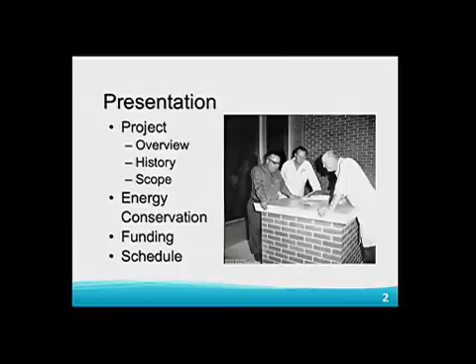Thanks, Ted. Freeman Anthony, Public Works. We're going to take a closer look at this project and the scheduling. I also was fortunate to dig into some of Whatcom's archives for this presentation, so there's some good old stuff here. Today we'll cover the project background—Ted covered some of that—then look at energy conservation aspects, the funding, and the schedule.

History of the project, going back to the plant. As Ted said, it's unique that it doesn't have pre-treatment. It is fairly common to have that now in Washington. Pre-treatment can help a lot with turbidity events, where large rain events suddenly add a lot of suspended solids. Typically we've been taking those out through our gravity filters, but there are better processes to do that on the front end. This pre-treatment project was specifically identified in the Water Comp Plan update in 2013.

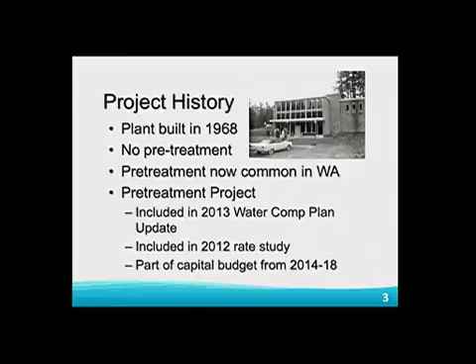We did consider the funding in the 2012 rate study, and it's been in our capital budget for a few years now. There was also some pilot testing done—we've been at this since probably 2010 or so, thinking and contemplating what this project would look like. In 2010, we did an analysis of the different technologies out there via our triple bottom line plus approach.

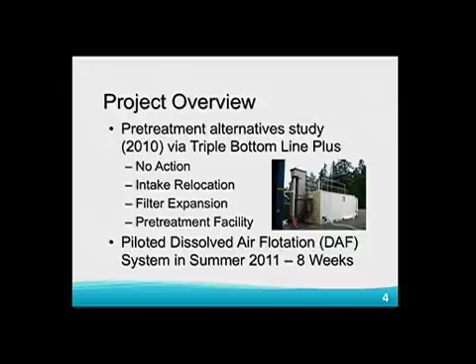We looked at some basics—what could we do for pretreatment? We could do nothing, we could do an intake relocation for the source water, we could add more bays instead of adding pretreatment, or look at a facility. We piloted a dissolved air flotation system for about 8 weeks in the summer of 2011 because technically that seemed like the best fit, and we were pretty comfortable with the results. Staff also visited a couple sites up and down the coast to look at existing facilities.

So what does the pretreatment look like? Well, it's called dissolved air flotation. Basically it's a couple pretreatment basins that allow us to remove the suspended sediment, and we can expand these in the future to three if we need. Having two trains allows you to run one and take the other down for redundancy, which is a huge help from a maintenance standpoint.

That's really the bulk of the project, both in cost and technical challenge, is going to be the pretreatment system. When we are up there doing these upgrades, there's a couple other things that we need to add to the scope of the project.

One is going to be an upgrade to the chlorine injection system. There's two reasons we have to do that. One is, as we construct the pretreatment facility, building permits are needed, and therefore you have to upgrade your building to code. Our current buildings do not meet code for storage of the chlorine cylinders. Also, the chlorine delivery system equipment is at least 20 years old, and it's time to replace that equipment. It's hard to get parts for those. So that's an added piece of scope to the project that is pretty much exclusive of the pretreatment tanks.

And then in addition to that, we're going to put an injection system in for taste and odors. The scope of the project is going to include just the pipe work required for this future taste and odor system. Right now we've kept it out of the budget just for cost control. If there's an opportunity as we go through to put the actual dosing system in, we'll do that. But right now we're going to put the injection system in, but hold off on the actual storage and delivery of the taste and odor treatment.

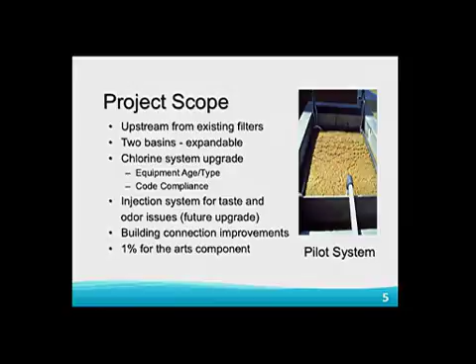So that's something we've worked on with planning. We're trying to incorporate the art into the project rather than a big statue of something. We're looking at rerouting a little bit of the adjacent trail along Whatcom Creek to be a little more natural and to put some signage and art in that pedestrian experience, while also improving connectivity for the trail users through there.

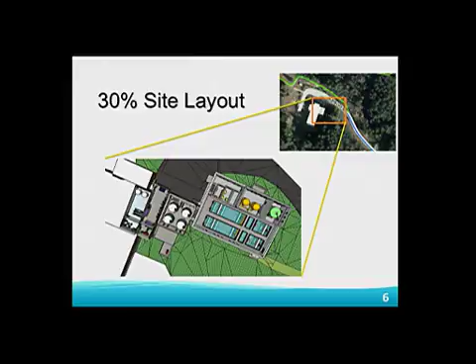Energy conservation. In tune with our climate action plan, we asked, okay, what is this going to add to the plant as far as the electrical draw each year? We got our consultants to quantify that and looked at what the options were around town for water-related efficiency or energy production to offset that energy use.

We did look at inline hydro turbines, and we had a look at this probably 8 or 10 years ago. We would love to do it. We do have a large water supply that is above the city, but the bottom line is it's not really very far above the city. We have service areas above that high water line, but what you really need is an impoundment that's 300 or 400 feet above everything, like in Boulder, where you'd have some excess head to lose. The bottom line is we don't have any excess head in the system, so there's nothing that really works well for inline hydro.

The other thing is we are creatures of habit, and we use a lot at different points during the day, but the flows through the pipes to the city of Bellingham aren't consistent. You might make a bunch of power while everybody's having a shower in the morning on one line, but then it's not going to do anything at 4 in the morning, so you're not generating power. Those are the basic issues with trying to do that in the existing system. In the future, if you have a water user that uses water 24 hours a day and lots of it, that's where you might find that application useful.

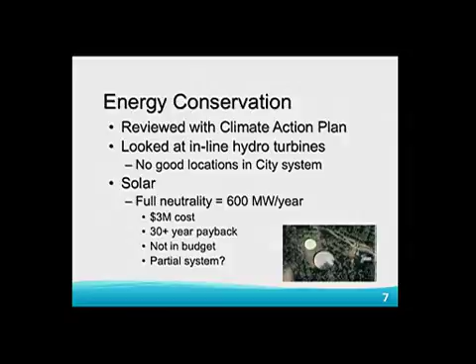The idea is, what can we do to offset that power use that we're adding to the system? So we'll be taking that back to council when we get a better scope of what that looks like. I don't know, Eric, if you have any additional comments on that? Okay.

So the project funding, there it is from the 15-16 budget. We have a combination of funding sources. We're still using our 2008 water sewer bond, which has basically paid for all the design requirements. We have a state revolving loan fund that will cover the bulk of the funding, and then we look at 2016 water funds or other future funded things to take up any excess that's necessary.

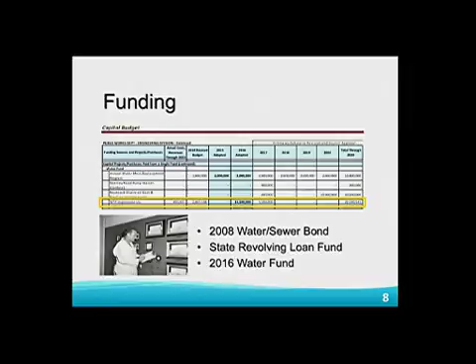Schedule: so today, immediately following this presentation, we will ask for a bid award. The bid award is for the DAF equipment itself, and DAF is dissolved air flotation. That's really the guts of the whole project. We've done a pre-selection for the equipment, so we know who is going to be delivering it. It was still a competitive bid. There were two bidders, both out of Pennsylvania. It's a very specialty type of construction.

But now that we have this bidder selected and presumably awarded, we can work directly with them as we design the concrete structures and all the piping penetrations, so that at the end of the day we know what we're going to get, and it's not a big design change when you get a different equipment vendor. So that'll be forthcoming today.

In October, we'd like to do the same with the chlorine generation equipment, also known as the HYPO system. We want to know who we're going to get, bring you a bid award for the lowest bidder, and then work with them through the design.

In January, we're looking for a 90% design, and we'll come back to council and say this is what it looks like. We'll have an idea of the art components at that point, and really our final budget numbers. We can understand if we can bring the taste and odor system in its entirety back into the project, or if that's just going to be the injection system for now, with a follow-up project in the future.

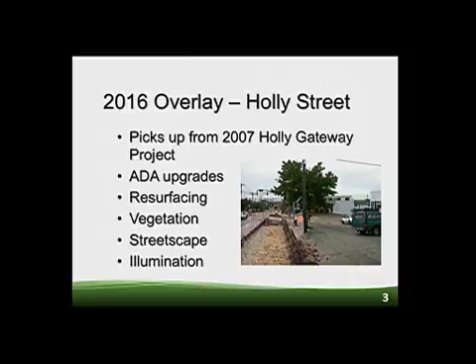How are we doing with vegetation? Are there streetscape improvements that could make it a more vibrant corridor? We'll also take a look at illumination, although, as you know, we have an LED retrofit going on all over town, so I expect illumination to largely fall out of the scope for this project.

So we'll take a closer look at the brick and bollard ADA upgrades. This is from our concept plans that we shared at the open house. I hate to say it, but it's kind of boring—we're basically keeping the same thing that we have.

What we are doing is using a white granite paver to serve the purpose of the truncated domes—those are the yellow pads you see on sidewalk ramps. Instead of doing yellow, planning said no, you have to do something nice. So we're using white granite pavers that meet the ADA requirements with the truncated domes.

Visually, the contrast will still be there, but it'll be less garish than the yellow. We'll also be relocating and upgrading the bollards.

I know there's been some discussion of the bollards. Our intent is to largely keep the same design aesthetic of the existing bollards, but we'd like them cast as one piece with a lifting eye for operations—it makes it safer to move them around. Currently they're actually two pieces of concrete glued together, so they can be kind of a chore; they can fall apart. So we're making a few upgrades for the maintenance folks.

We'll keep largely the same pedestrian footprint that we have now, with minor modifications to ensure we keep the minimum 10-foot returns and that sort of thing. We'll be upgrading a couple of the ADA parking stalls so they have their own little ramp right up from the stall—we have ADA parking stalls, but they need to be updated a little. That's really the bulk of the project.

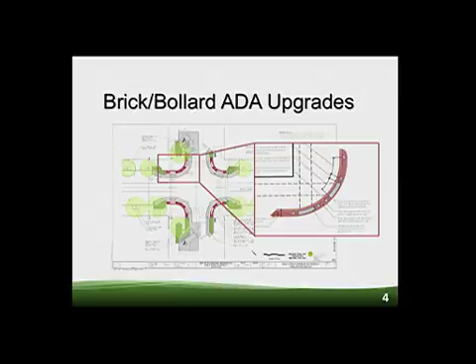At each one of these corners there'll be a fair amount of work, and that'll be a bit disruptive—okay, a lot disruptive. But we'll try to preserve as much of the existing sidewalk area as we can, because that both facilitates movement during construction and it's less costly if we can keep the existing sidewalk.

One thing you'll see on Alabama right now is we're widening up all the tree wells to remove impervious surface and increase the open area around the root structure—our understanding is that makes for healthier trees. We're not going to put in any tree grates here. What we're hearing from our consultant is trees thrive best with some sort of mulch or crushed stone backfill, not a grate. From a maintenance standpoint that's actually quite helpful too, because it's much easier to freshen that up and make sure it's flush, versus cutting out chunks of grates.

The Arts District will still have its own grate system, but this is the main downtown. You'll see ADA upgrades at the alley crossings and similar spots. We'll also do some curb and gutter replacement here and there, making sure we wind up with a 6-inch reveal on the curbs, which is basically pedestrian protection.

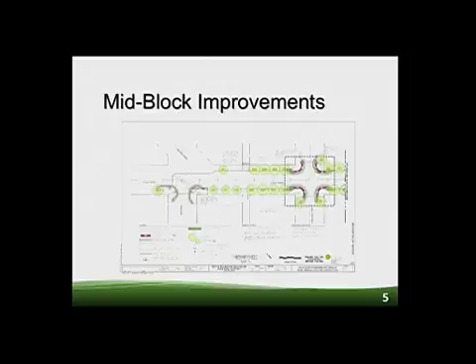That really covers your street improvements there. We will be bulbing out the 2 corners of Bay Street, heading down to the bridge, right opposite from Bayou. That's a lot of pedestrian traffic there.

So as Ted said, looking at the corridor and then referencing the bicycle master plan, we need to take a hard look at this corridor. It's a very important corridor for a lot of reasons.

The initial study was, well, we want to put a bicycle facility. We realize that keeping the design aesthetics is important, parking is very important. So the first review will be, okay, in lieu, could you remove traffic from one lane and put a bicycle facility there and use 2 lanes with through traffic with proper left-hand, right-hand turn design? Would that work? We're chewing on that right now.

We'll go through the options. That is your baseline, but then also looking at a separated bike track, costs associated with that, and then any number of different options. We have concept sketches from the bicycle master plan specific for Holly, so we have a good starting point for that. When we get through that study and have some recommendations, we'll go to the Transportation Commission, work with them, and then eventually bring it back to council.

Anything else on that? The one comment on the Holly project is we have a budget identified of 1.5 million, which should be adequate for the overlay and would be adequate for some bicycle improvements.

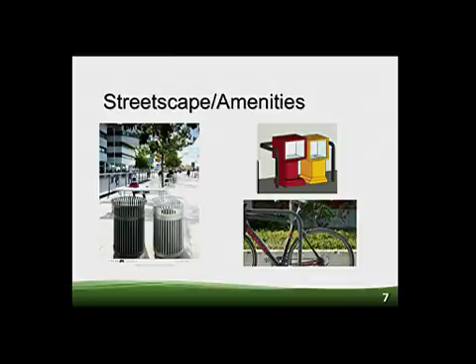I would defer to planning on the sandwich boards. The city has been working, planning, Public Works, the police department, legal, on really focusing on the sidewalks, primarily in the commercial core, and making sure that we have adequate clear zone distance so that we meet ADA, and that's been the focus.

Whatever that means, it means cafes, sidewalk cafes that might be encroaching, tree wells that Freeman talked about, sandwich board signs, the newspaper racks, all of those things go into that. We sent a brochure out to the downtown merchants this year, and also to Fairhaven, reminding them about clear zones. We've talked to all of our inspectors and our capital project engineers and worked closely with planning on the same thing. The sandwich board issue is something that the group has looked at, and we'll take your comments and bring those back to the group and see what our next steps might be.

For our legally blind travelers, those things present a terrible obstacle. One thing we did, which was very helpful, and Freeman was part of this along with Heather Higgins when she still worked for Public Works, we met up with a couple members of the blind community and walked downtown to get their perspective as they negotiated downtown and all the obstacles. We learned quite a bit through that process, and still have those folks we reach out to and run issues by. But you're right, it's a challenge, and anything in the sidewalk pedestrian environment, whether it's our trash and recycling receptacles or any signs, is a challenge.